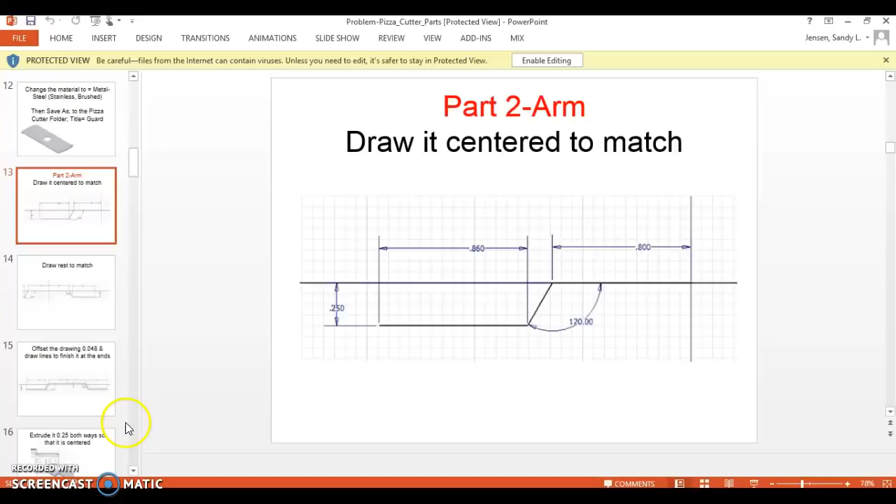Alright, so we're going to start working on the arm portion. At this point, you should have at least made the guard, and you could have skipped ahead and did the other ones, but we're going to focus on making this portion right now.

So you need to go into Inventor, create a new part file, and I'm using an older version right now instead of the 2017 that you'll have access to at school. So this one, pretty much everything's in the same spot. My background and stuff might look a little bit different. So load up a new part file, start your sketch, again choose your XY plane, and then we are going to go ahead and start here.

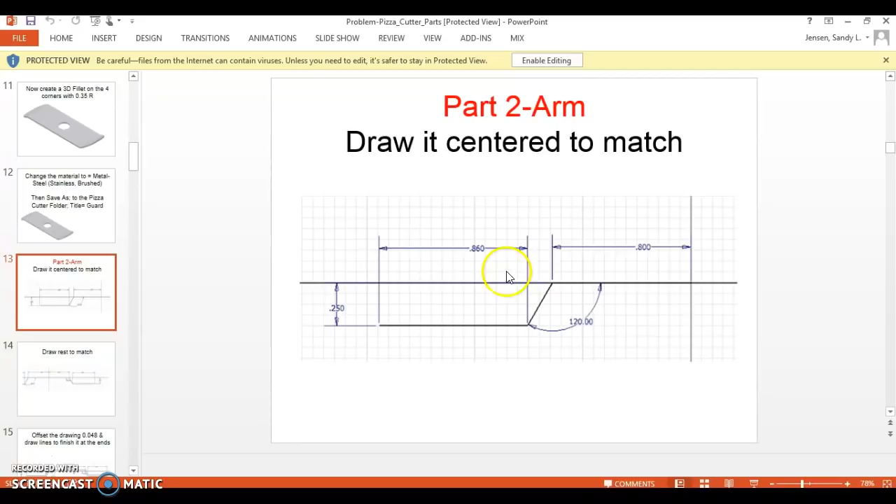I mentioned earlier that the dimension does say 0.25 here, and then on this one it says 0.230. That is not an error. One side is going to be smaller than the other. So we're going to draw this side first, starting from the center point. So we've got a line going over 0.8, and then we've got a line that goes down 0.25, and then a line going over 0.860 with a 120 degree angle. So we'll do this piece by piece.

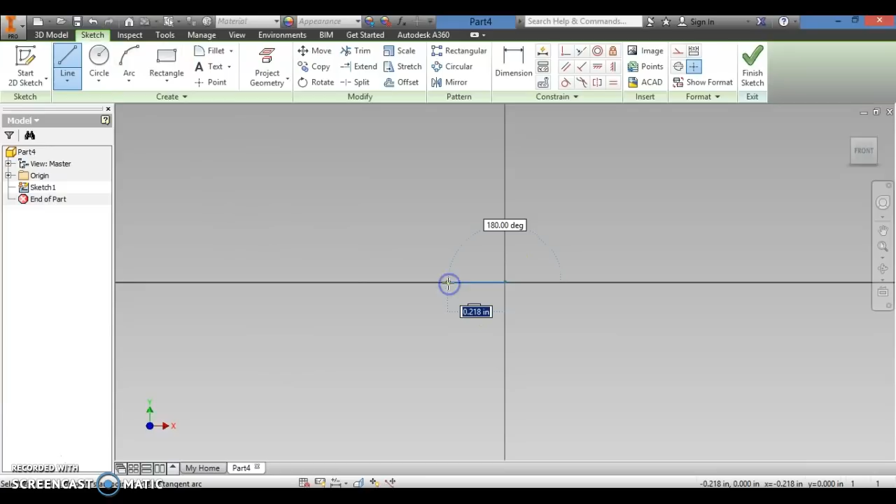So we've got a line that goes over 0.8, a line that goes down, and I'll adjust that in a minute. And then I think the second one was 0.860. And I'm going to tab back out just to double check 0.860. And then I'm going to use my dimension tool to make sure that this line is 0.25

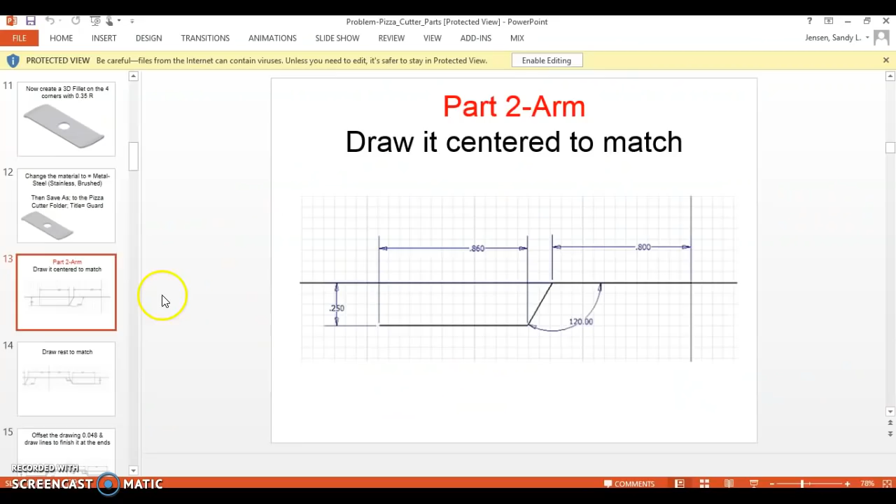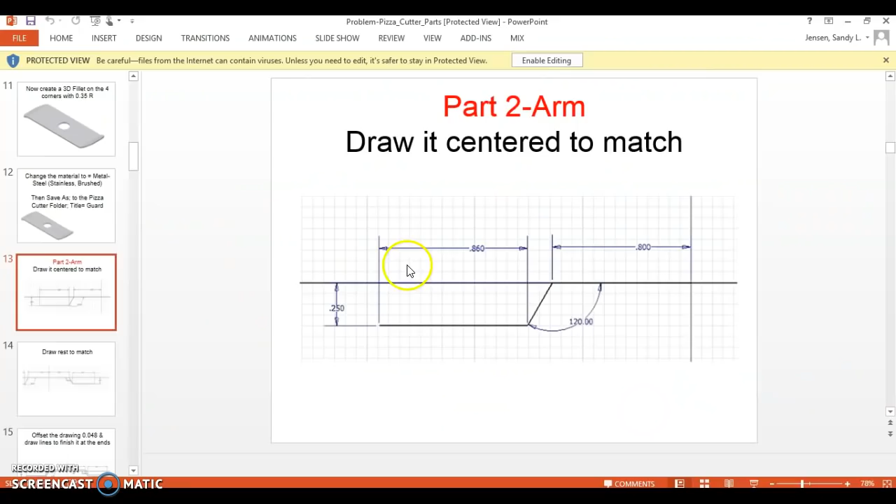and that the angle from here to here is set to 120 like it is right here. So I've set that to 120, and it will make those adjustments for me. So everything on this side is in good shape. Next we're going to go to this one.

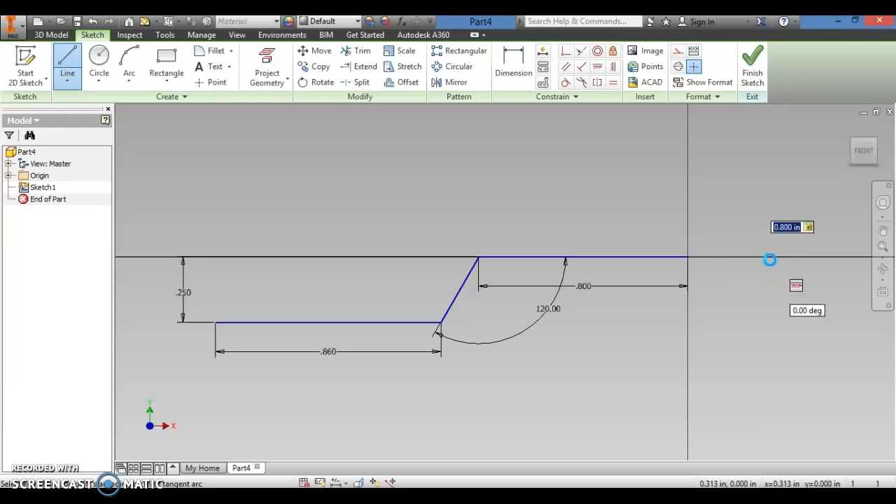We're going to draw the other side of this, and you'll notice that again from the center point this side goes over 0.8 and 0.860, and again this one does the exact same thing. You could almost get away with mirroring this and then just making an adjustment on this line, but I'm going to go ahead and just draw it. You can try to mirror it if you want to, and then after you mirror it you can make the adjustment to that one line. I'm going to line it up with this one.

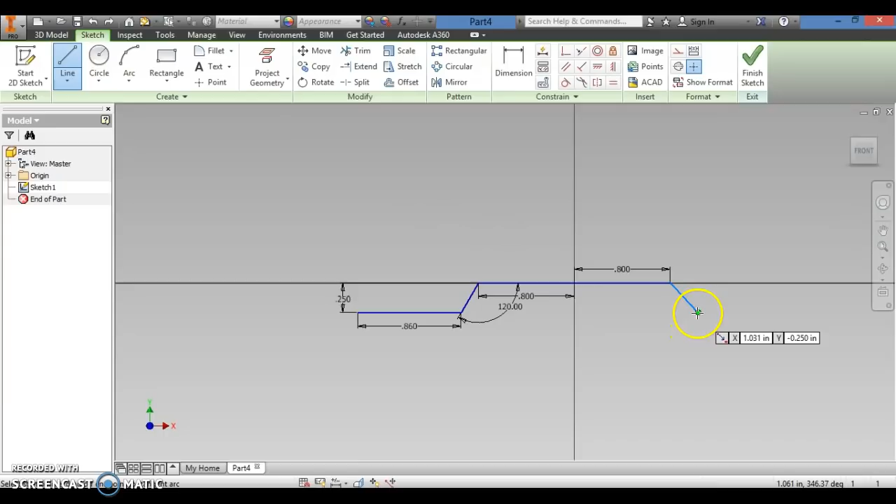This one goes over 0.86, and if you accidentally put it at an angle like I did, just undo it and redo the line. So again, 0.86, hit enter. Double check the dimension from here to here. It should be at 0.25, so that one's good. And we'll just leave it there. And then we just need to adjust the dimension of this to this, which should be 120.

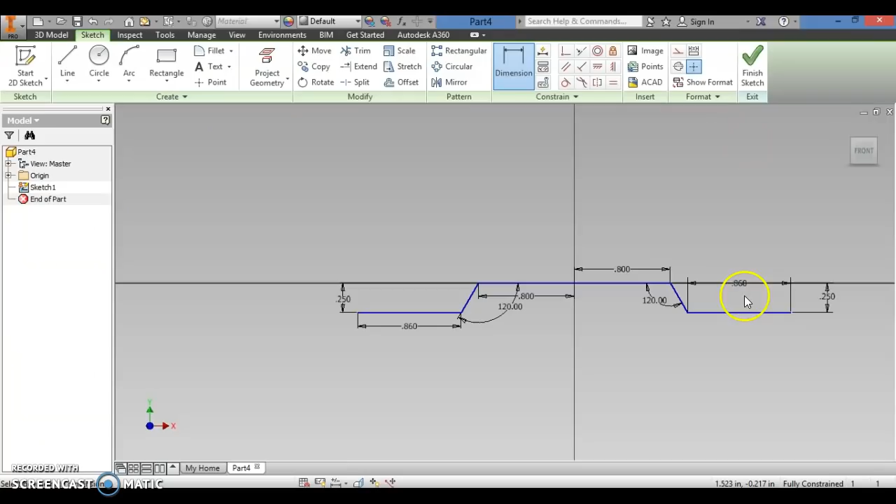And then the last thing that we need to do, since we have that 0.250 in place, we're going to go back, and I had lined it up with the other one. This is what would happen if you mirrored it. I'm now going to make an adjustment to that so that it's 0.230. So I'll click here, 230, hit enter, and it will slightly adjust that line. So they're a little bit offset from each other now, not exactly the same height.

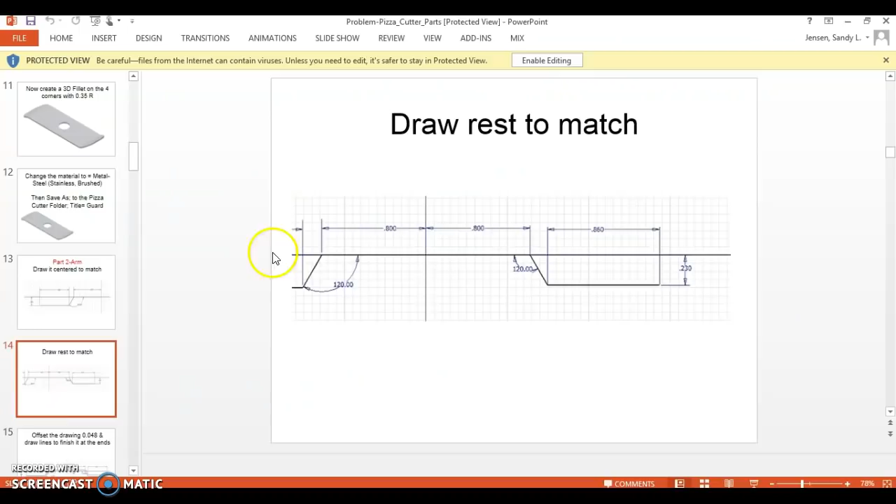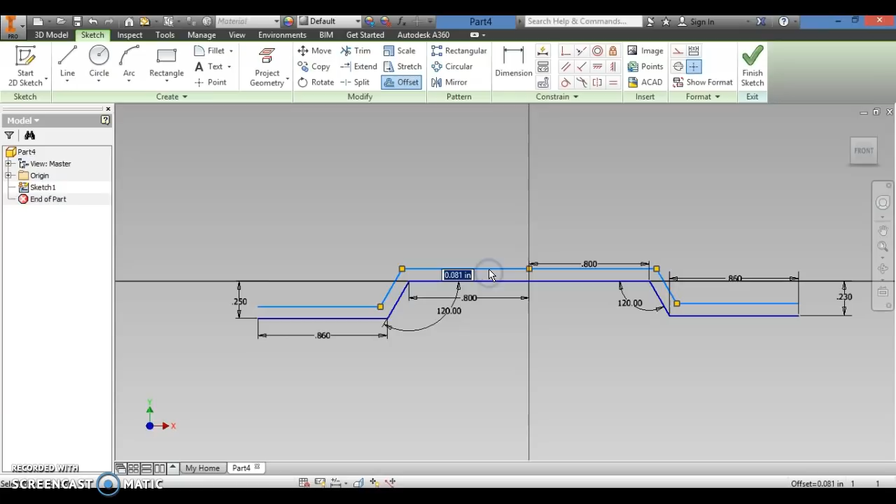Next thing that it wants us to do is offset the entire drawing, and we're going to offset in the upward direction, or going up the axis. So we're going to go 0.048, and then we're going to cap off the ends of it. So again, offset, it should select everything, 0.048. Same thing that they have here, it's really small. And then we're going to cap off the ends. So again, use the line tool, zoom in, make sure you're getting green dot to green dot, so that way you can actually extrude the shapes.

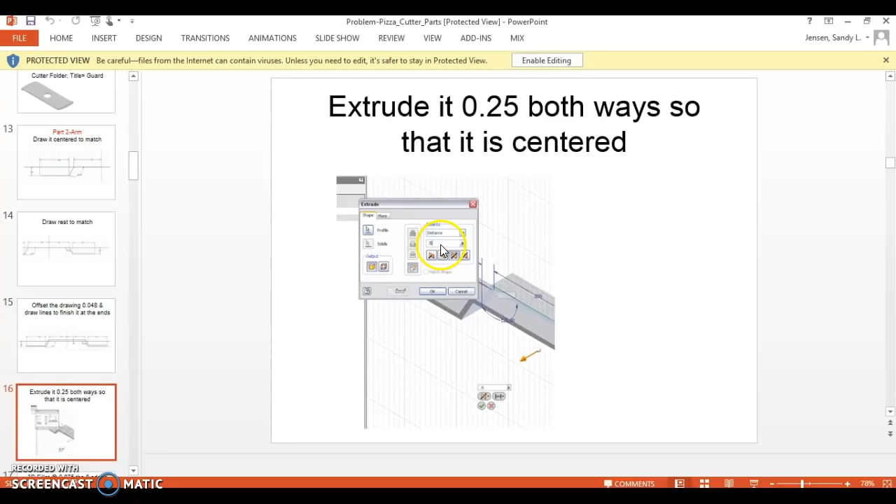And the next portion is going to have us extrude it 0.25 both ways so that it's centered. Make sure that you look very carefully at this. They have 0.5 in here, that's correct, so that it goes 0.25 this way and then 0.25 that direction. So we're going to hit finish sketch, go ahead and start the extrusion, center using the symmetric one, and then 0.5. If you put 0.25, it'll be way too skinny, and you'll notice some issues later on when you're working on this. So we have that portion set.

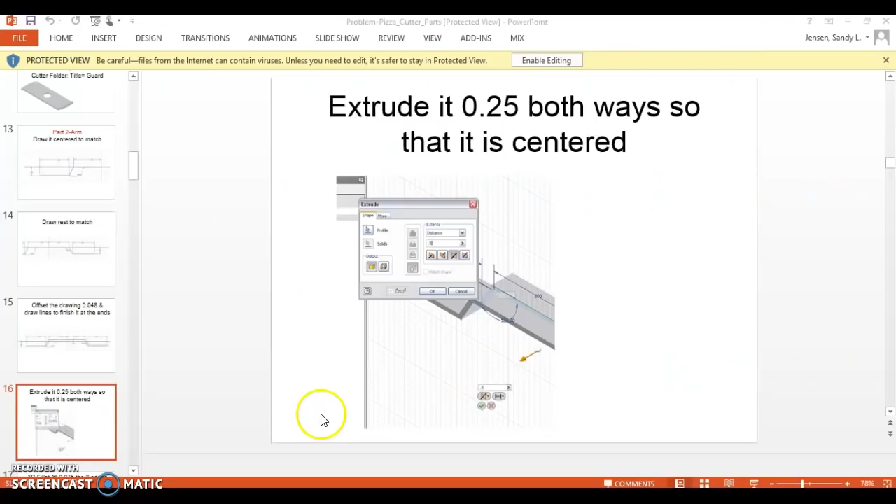Now it wants us to use the 3D fillet and set that to 0.075, and it wants us to hit the 8 edges. So it looks more bent like some of the other parts. The 8 edges are the corners that you're going to see right here on the top, and the ones that are directly below it going across. So set the fillet.

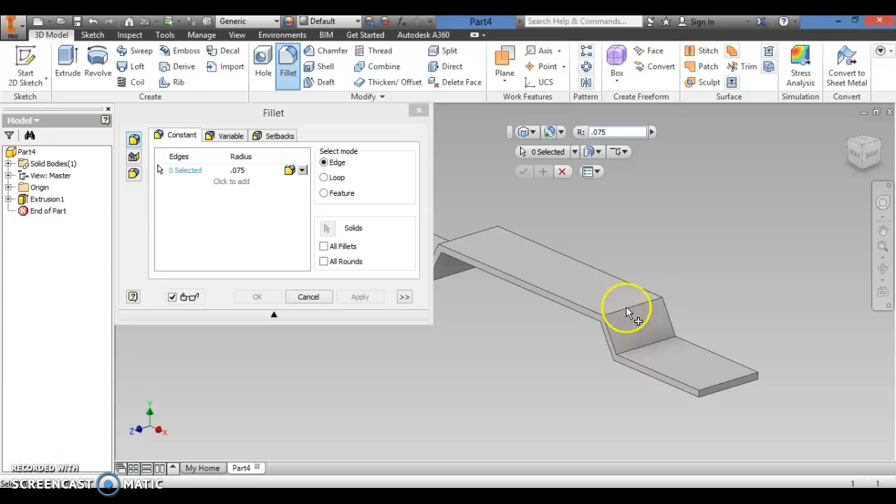They give us a 0.075 measurement, so we're going to set this to 0.075. Don't have to change anything. And then I'm going to start with this one, hit this edge right here. There's an edge right here. If you have to rotate to see it, that's fine. I'm going to hit this corner, rotate so I can see this one, this edge right here, and then one more edge right here, and just make sure it lines up so you actually hit it, and then just hit

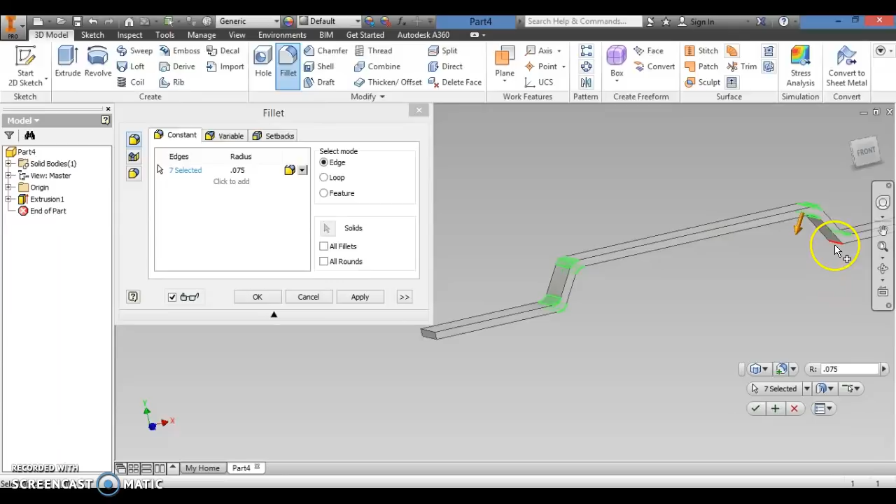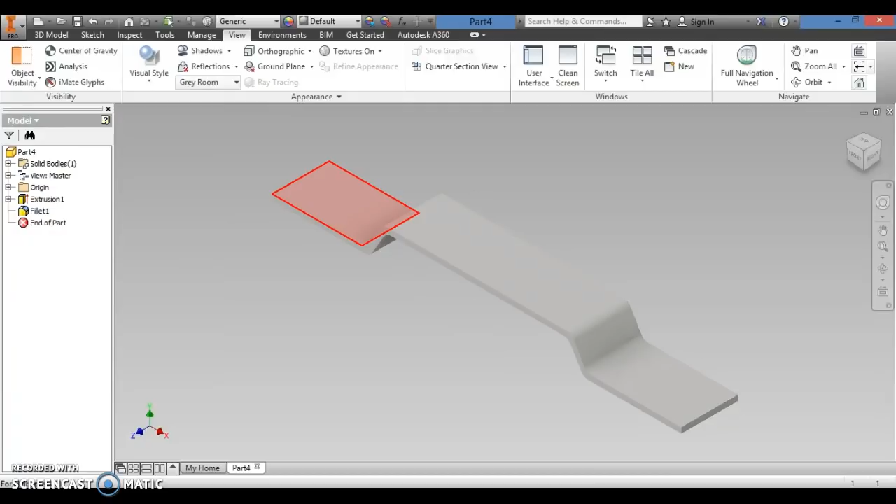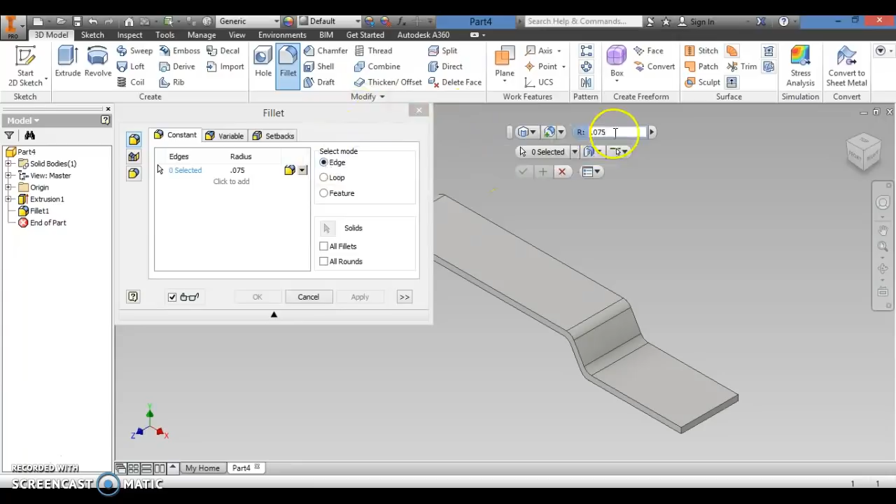Next thing that we're going to do is create a 0.2 fillet for the two edges of the right side only. This is the right side. So I'm going to go to the fillet tool. We're going to set that to 0.20. And this is where you'll know if you really screwed up on the width measurement for the extrusion, because this usually will overlap if you did it wrong. It should look like this. So you hit OK, and you get those rounded edges there.

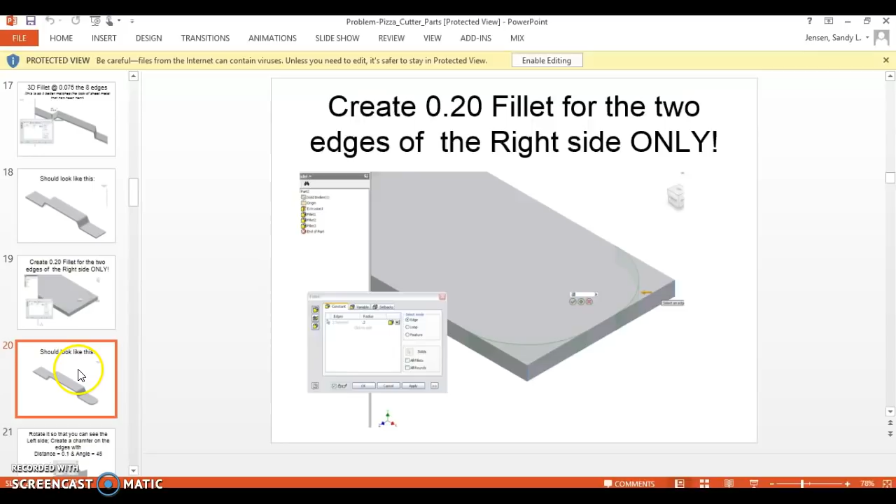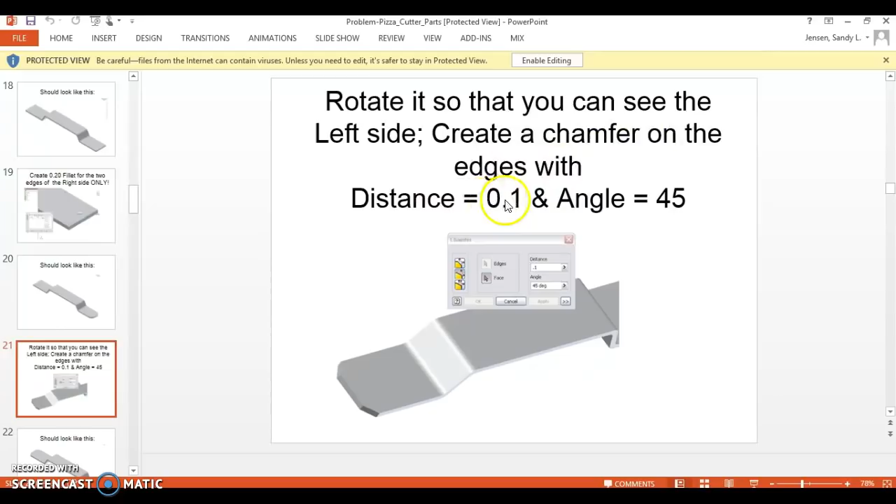Once you are done with that, it will look similar to this. So I'll zoom out so you can actually see it. Yours should look just like this one. And then we're going to go down here. We're going to put some chamfers on the other side. So again, we're going to rotate it so you can see the left side. And they're giving us a chamfer on the edges with a distance of 0.1. That's the middle option right here, 0.1 and an angle of 45. So we're going to use chamfer 0.1, and I believe it's set to 45.

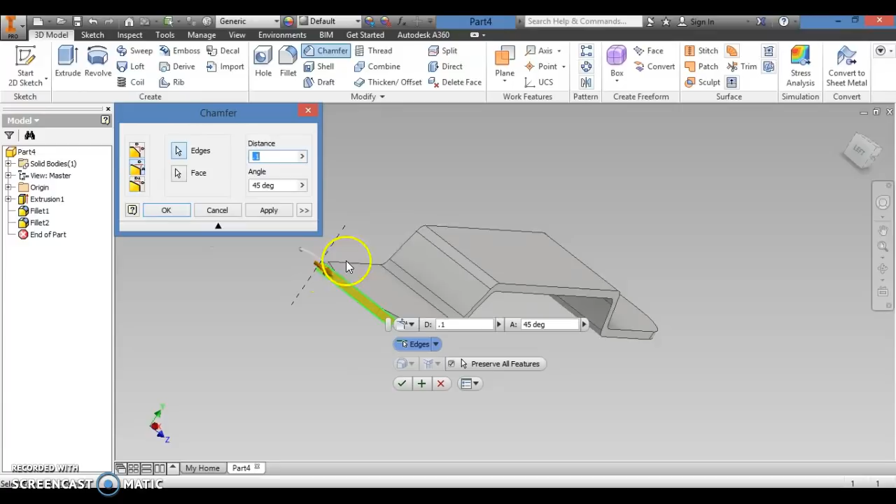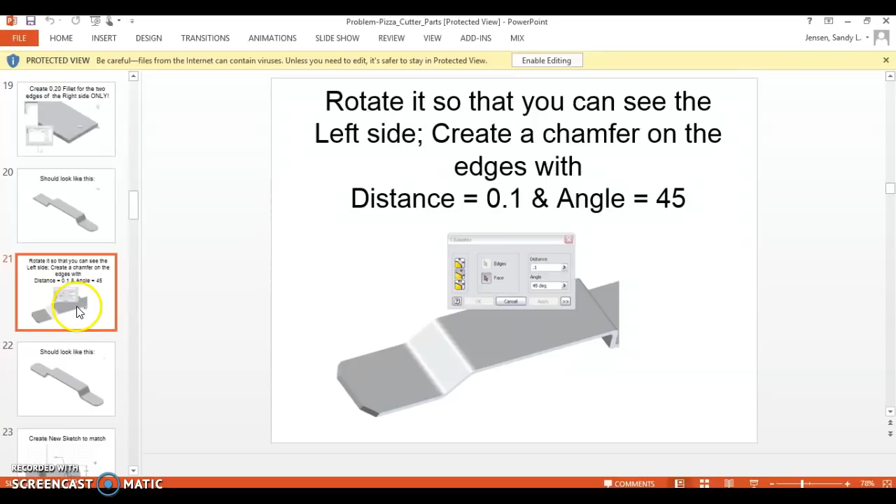You can rotate this if you haven't already done so, and you're just going to click the face and then the edge. Same thing with this one and the edge, so that I can see it. I'm going to rotate a little bit. I can see that it's made my cuts in there. I'm going to hit OK. Rotate this back. So now I have those edges chamfered. It's not the only way that you can chamfer it, but that's probably the quickest way. So you should have something that looks like this.

We're going to create a new sketch on the right side that is the rounded edge. So start a sketch over here. We are going to use the project geometry on this one so that we get the outline. Mine right now is showing up green because of my background settings and how I have this set up. Yours should look yellow like this. And I'm going to go ahead and place a circle that has a diameter of 0.17. So I need to find the center point, and I'm just going to place this. Doesn't really matter where, 0.17.

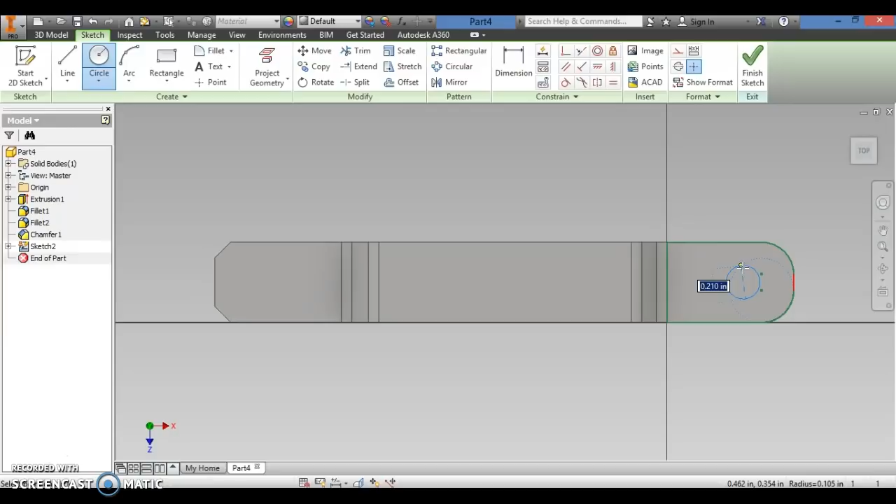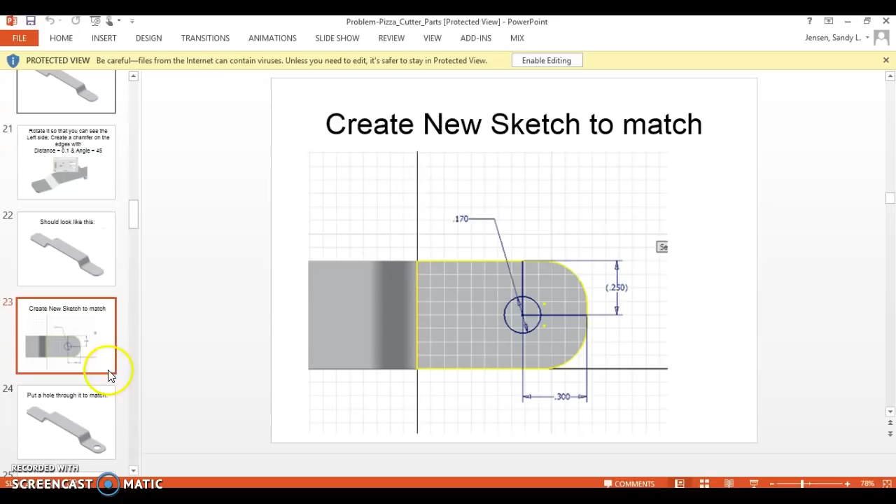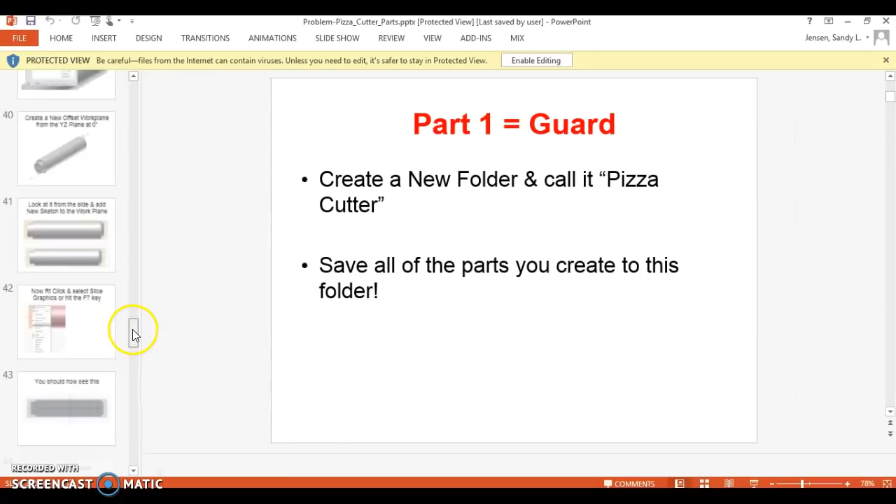Got my circle, and now I'm going to use the dimension tool to get it to the correct position. So it's 0.250 down from the top and 0.30 away from this edge. So I'm going to double check that the center is 0.30 from here, or 0.3. And this one should be from here 0.250, which it is already set at. Once you have that, put a hole all the way through so that it matches. Once you put the hole all the way through, let me scroll back down so you can see it. It will look like that.

So I'm going to go ahead and finish my sketch. Extrude this down. Make sure I cut out that section. Again, cut. You can change it to all if you want. The distance is far enough, so I'm just going to hit OK. And now I have that hole cut out on this one. I would set this one before you save it.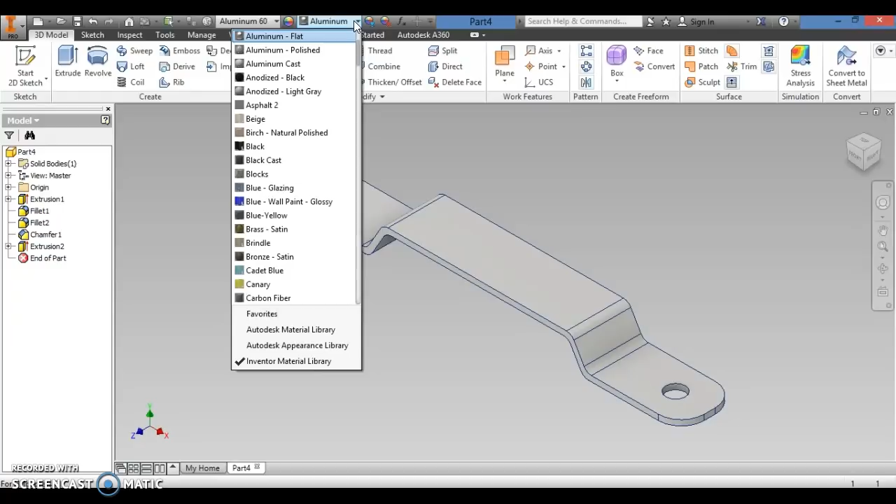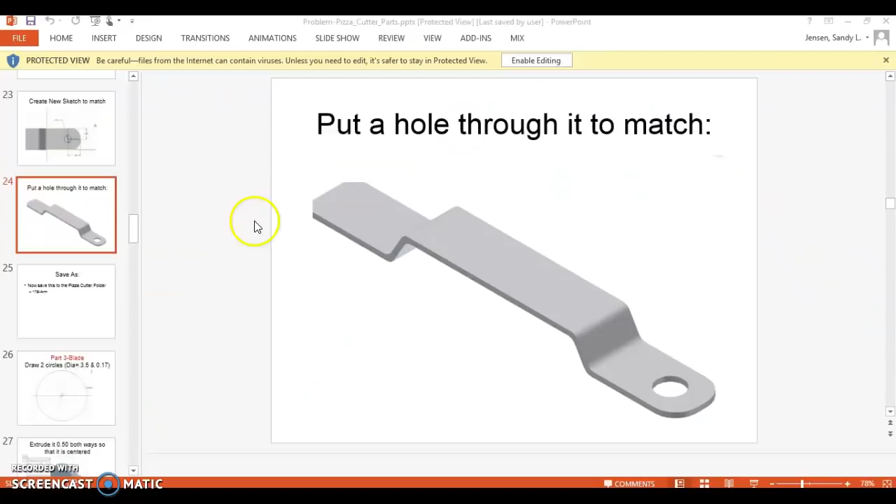It doesn't tell you to, but I would go ahead and make this one aluminum. And you don't have to change it to polished. You could leave it flat. You could even change it to stainless steel if you want. Aluminum is going to be a little more shiny. So I'll just change this one to aluminum, leave it flat. And then I'm going to, again, save this one as, I believe they have this one saved as arm. So go ahead, save it as arm. Or pizza arm. It doesn't really matter. And then you are finished with that part.